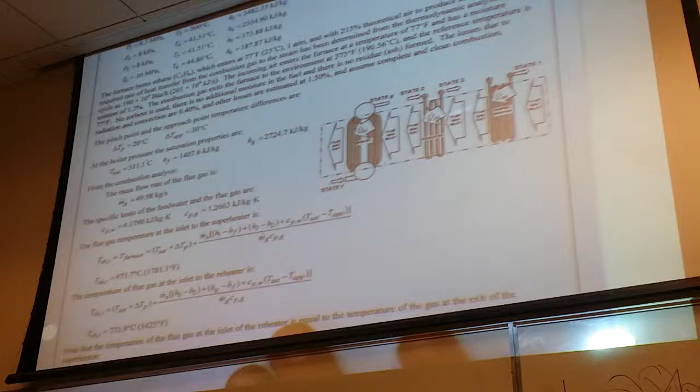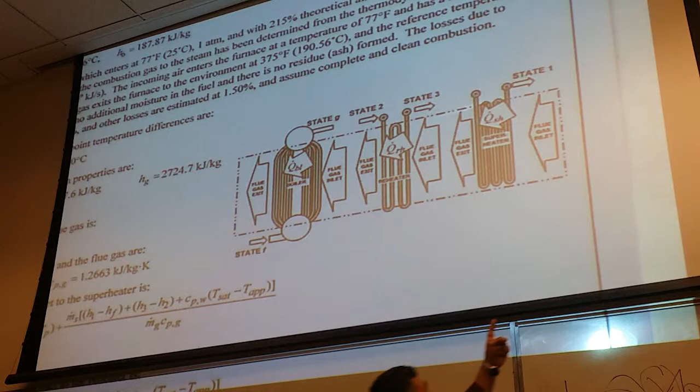Then there's this. And this is where you get to determine how you're going to lay out your components. The way this system was set up was that the gases leaving the furnace first encounter a superheater. The second thing they encounter is a reheater, and then we go on to the boiler.

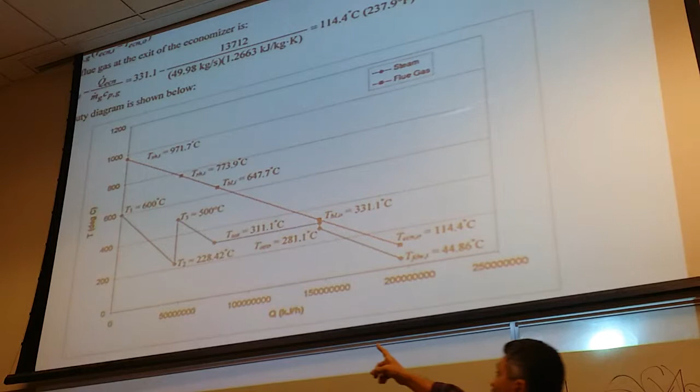So that when we build our temperature duty diagram, we have something that looks like this, where the first thing is, of course, the superheater, the reheater, and the boiler, and so on. So it depends on how you set up the components. So for example, you could have it where the first thing you encounter is the reheater. But you would have to set up your temperature duty diagram accordingly and account for all of the energy transfers

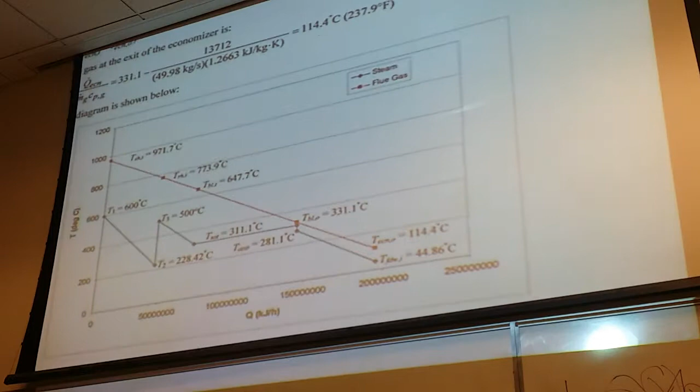that you need. In this case, when I did the calculation, it starts out at a little less than about 971 degrees C, and as we march through the plant, or through the cycle, or through the components, we first hit the superheater, onto the reheater, and the boiler, and each time we lose energy in the flue gas. So how you arrange those components is up to you. You just have to be able to account for them in your sizing calculation. And again, like I said, this is based on having a configuration that looks like this.

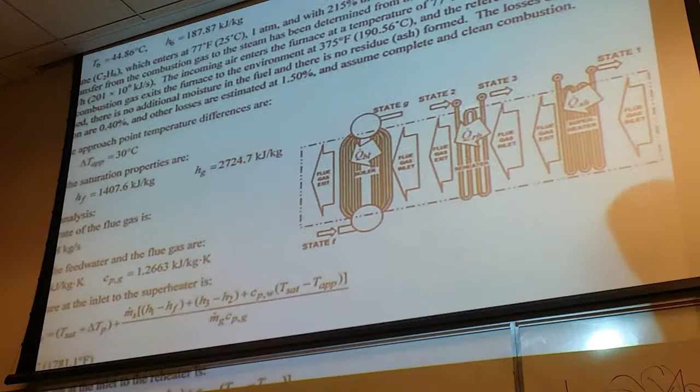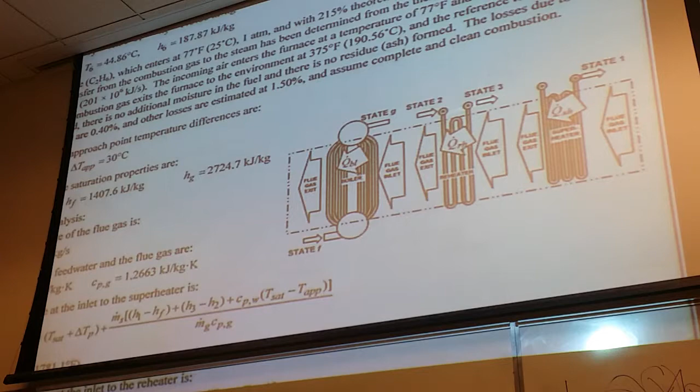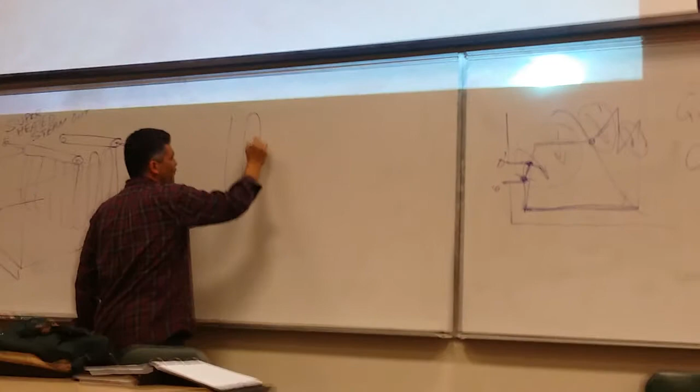Is there a specific geometry the reheater has? Is it a single tube that goes through? I mean, yeah, typically they are, and I'll draw it on the profile, but it is essentially a tube that kind of folds over itself like this, and then it's connected to a header. And then there will be a multiple series of tubes, so that if I'm looking at it from the front, what I'll see is a bunch of tubes. So it's similar to the superheater.

Yeah. So what happens is steam will come in here, and it'll move through, and then it'll come out the other end. And it'll be connected, like I said, in some of the header. That might be in the boiler, right? Reheat. I'm sorry, what? This is reheat, yes? This is for a reheater. Single phase heat transfer.

Going back to the condenser, so if we decide to add another condenser, you're basically taking, say in our case, we have 3 power generation sets. You have what? 3 power generation sets. So we would have 2 on each. Is that how you're setting it up? Is that not? You're the designer. Okay. So if you have a power generation set, that's the mass flow rate and all the states and temperatures and everything, you're meeting the power output requirements.

Your problem now is, okay, I now need to condense that steam. And the problem you're finding is if I have one condenser, the heat transfer required is excessive, and I'm not able to design a reasonable condenser, in which case I'm giving you the option of splitting that steam into, say, 2 condensers. And if you're having 3 identical sets, then you're essentially running 6 condensers.

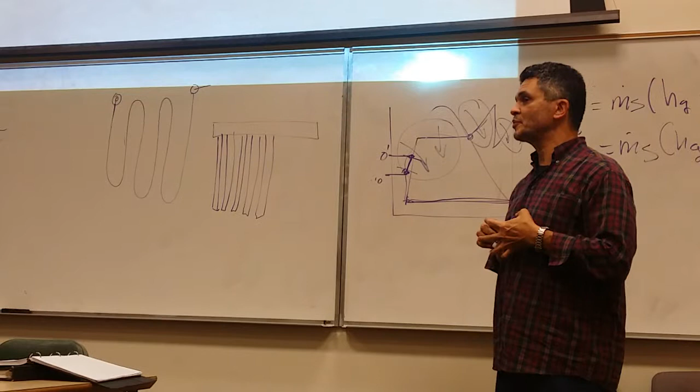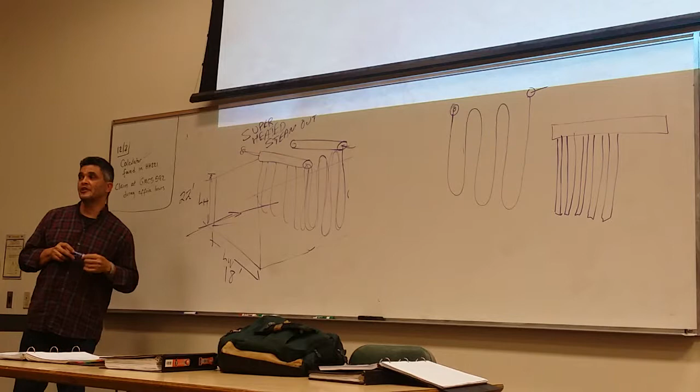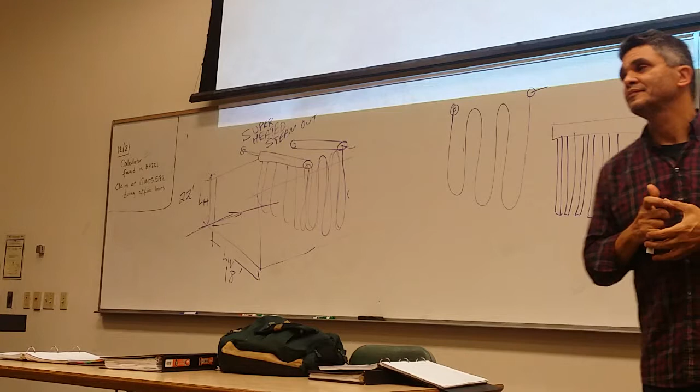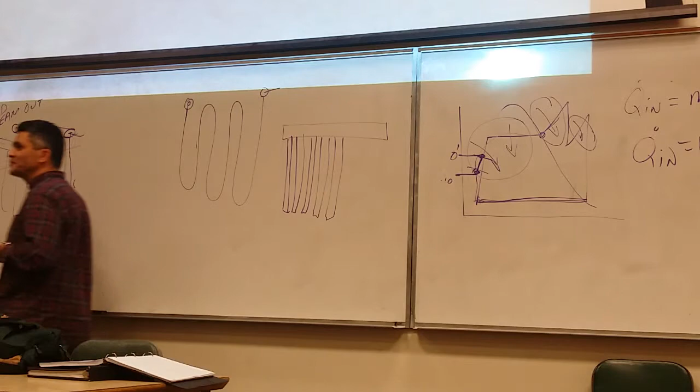Now, I believe I also gave you a series of tables for the heat transfer properties of steam at different pressures and temperatures for superheated steam. That's on Blackboard, and that's what you would use when you're dealing with superheaters and reheaters, because now you're dealing with elevated temperatures and pressures. But if you're dealing with the saturated values, you'd have the tables in the heat transfer book. And I don't know if I posted those tables because they're in your heat transfer text. Unless you sold it, you should hopefully still have that.

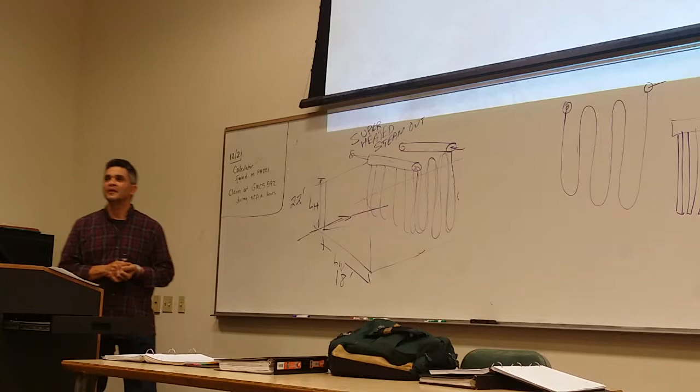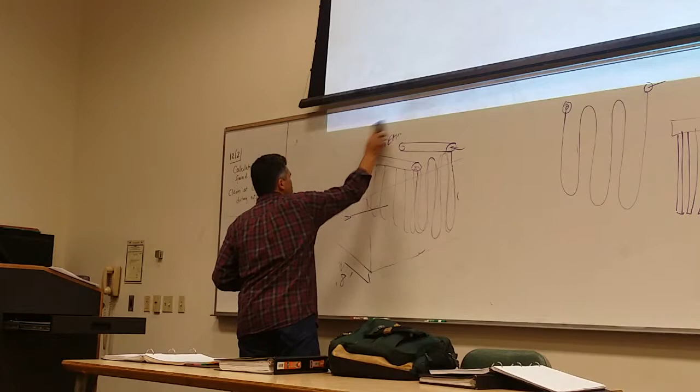Yes, sir. How can we handle the pressure flow across the system component, or just the pipe? I'm sorry, what? For the pump? Yeah. How can we handle the pressure flow across the system component? What is your question? How do you handle the pressure drops? No, once we calculate the pressure flow, how can we apply this number into the sizing for the pump? For the sizing for the pump? Yeah, selecting the pump. So how are we going to apply the number we get from pressure flow? Let's say for the condenser, superheater.

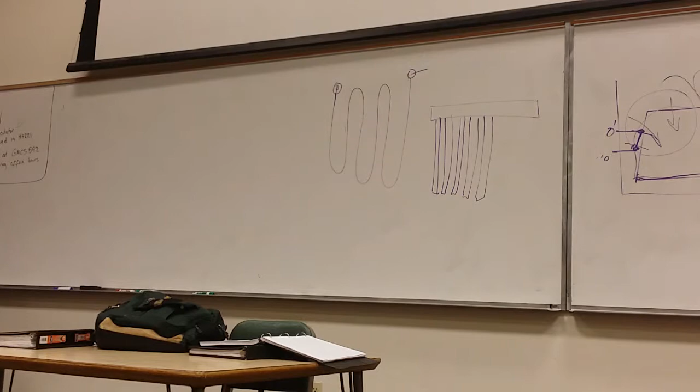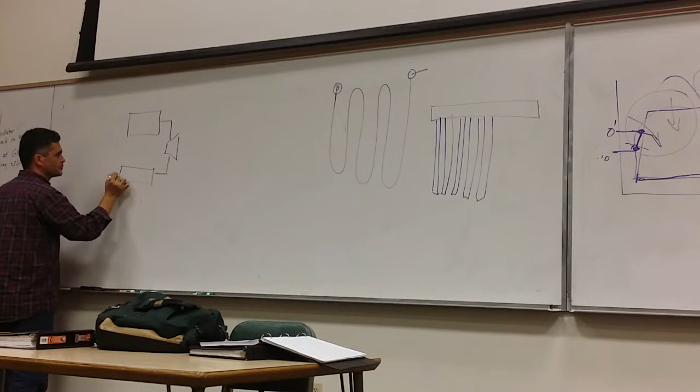In other words, okay, this is my system. And what's your question? So let's say the pressure drop across the superheater is 100 kPa. So how can we use this number for pump selection? Oh. And your pumping power requirement is going to be whatever your target is plus whatever pressure drops you're losing, because

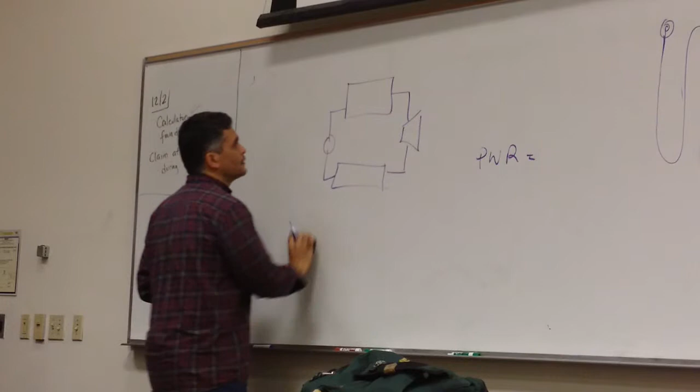if your goal is to operate at a certain pressure and have a certain work output, let's suppose that you're starting at 8 kPa down here at the condenser, and your goal is to pump it up to, let's say, 10 megapascals. That's the system requirement, right? That's what you need to be able to pump. But the other problem is you have pressure drops across the condenser and across the boiler and across the superheater, say. What about over generic piping? Yeah, and if you have frictional losses in your piping, let's call that piping losses.

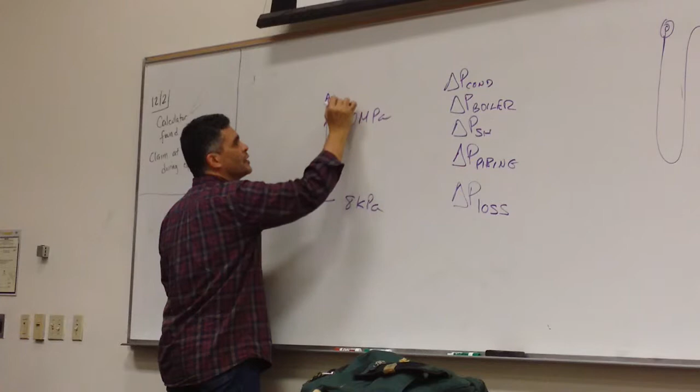So these would then be your delta P, what we'll call a loss. And now you actually have to pump this plus to account for that. So your pump actually has to account for those friction losses because they're essentially eating up some of that pumping power. So you would add that to it, just like we did for the pump characteristic curve when we were looking at a pump through a condenser. You're looking at the pumping power requirement to maintain a certain head, plus all the major and minor losses, because that has to overcome all that.

Otherwise, your system is going to get degraded by that amount, and you're not going to get the power output that you wanted. So, for example, when you weren't counting on pressure drops, you got 70 megawatts. But when you start calculating all the pressure drops, especially outside of the superheater, your pressure dropped a little bit, so now your enthalpy isn't what you thought it was.

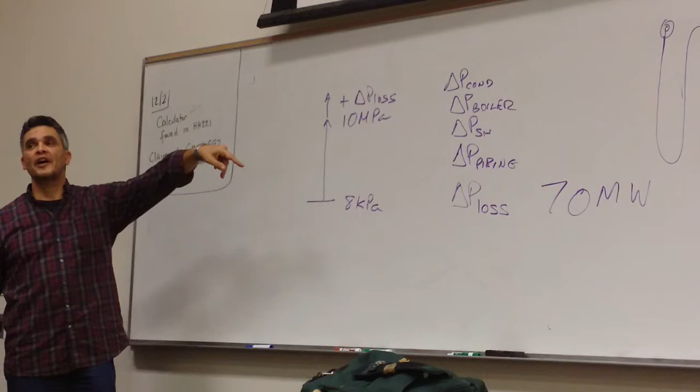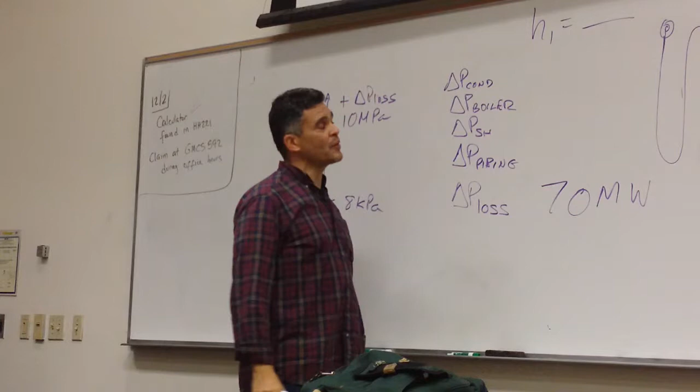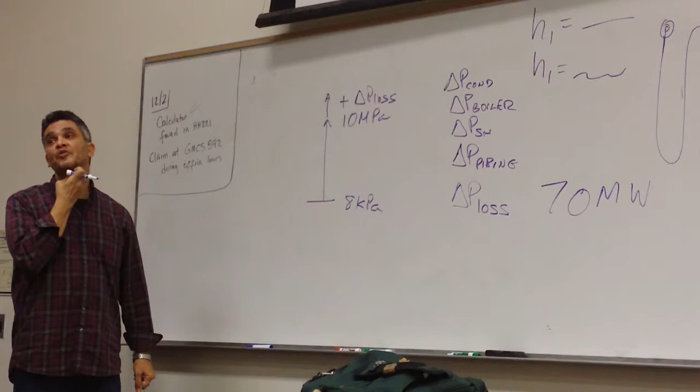Because when you calculated it without pressure loss, you got an H1 is equal to some number. But then when you calculate it with the pressure loss, you're now getting an H1 that's something different. And that goes into your work calculations, correct? So you're not getting the work out that you thought you were. So if you wanted to account for that, you'd have to then put that in there, so that you'd actually have to operate a little bit higher or accept the losses.

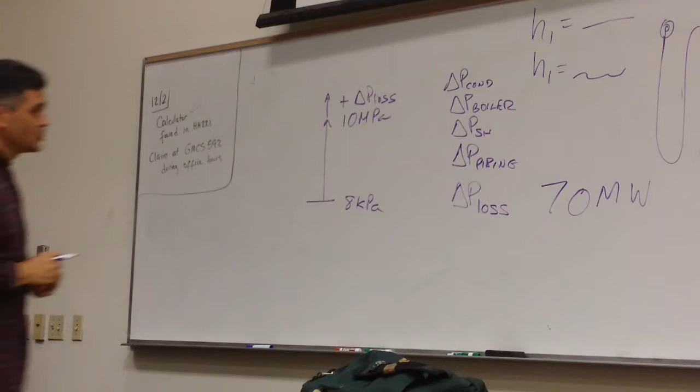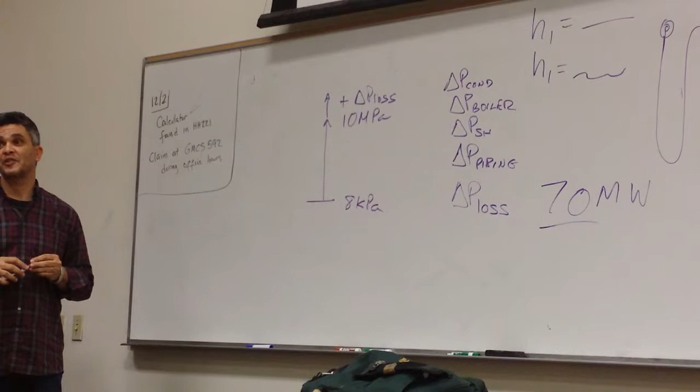In which case you'd have to then design your system so that even after you take into account all those losses, you're still delivering a minimum of 70 megawatts. And this is why I cautioned you early on not to just settle for getting to 70 megawatts and calling it a day, but rather trying to put in some buffer because you're going to see losses in the system due to pressure drops.

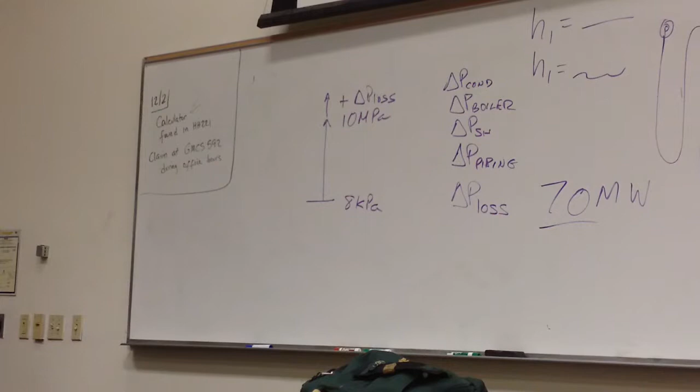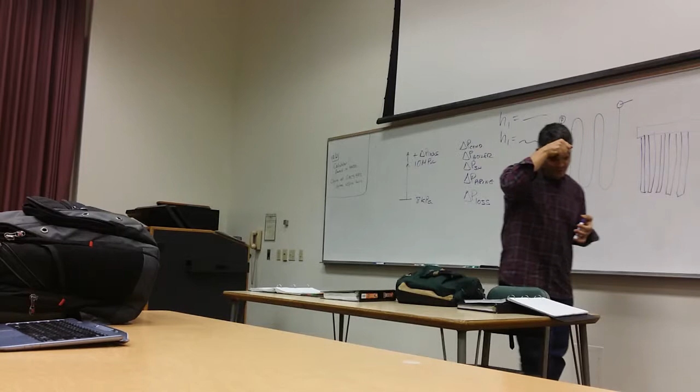Do we have to do the same thing for heat loss or no? No. We're gonna consider certain things to be adiabatic, so we're gonna consider things like pumps and turbines to be adiabatic in the sense that any heat loss that they lose is negligible in comparison to the work output. And we're also going to consider that condensers and feed water heaters and the like are insulated to the environment, so all of the heat transfer is taking place where you want it.

As well as the generic piping? Yeah, for the generic piping, we'll assume that there's not going to be any appreciable heat loss, just for the purposes of this project. When you calculate the pipe losses, it's given that from the boiler to the branch of your 4 turbine sets it's 155 feet. What about the distance from that branch to the actual turbines? Do we have to include that? Negligible.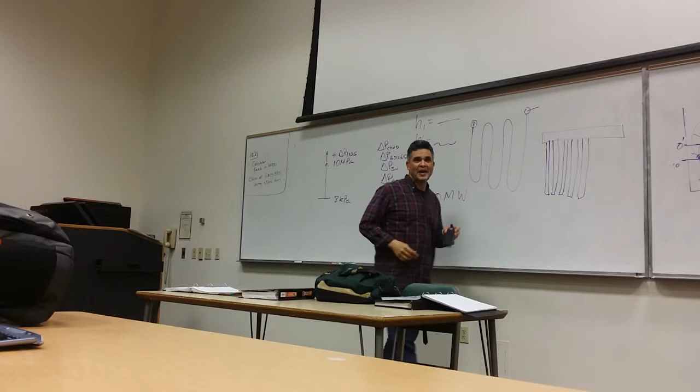Because then, like you were asking, how detailed do I want the schematic? So we don't have to include the 90-degree turns? No, I'm not asking you to come up and calculate the piping to each individual turbine and the piping from the turbines to the condensers and the piping from the condensers back. So the pressure entering the turbines is equal to the pressure out of the boiler minus the pressure loss over that 155 feet? Yeah, do it like that. Okay.

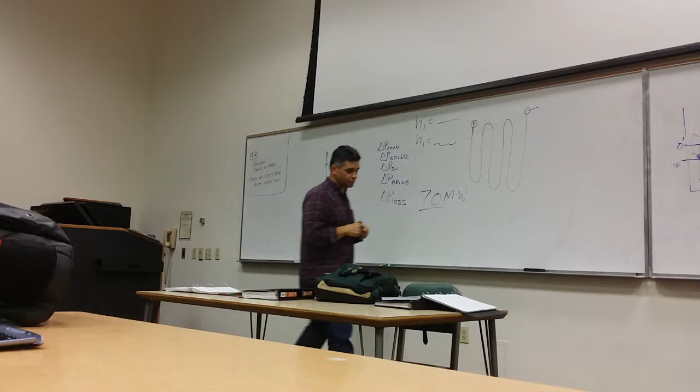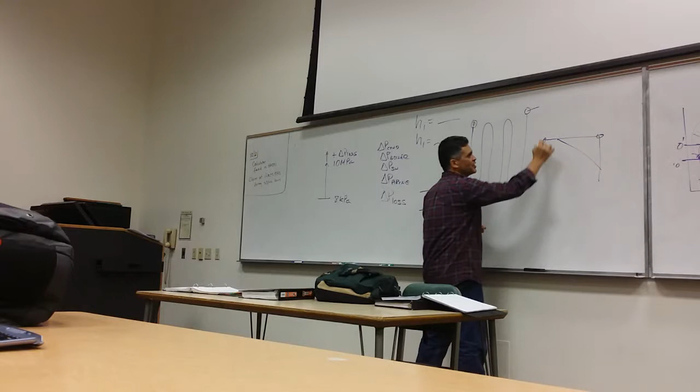Any other questions? Yes? So in regard to estimating the length of the pipes, you just want us to go off the schematic you gave us? Yeah. I'm not giving you any requirements on how you route it. That's up to you. Like I said, you can go out from here straight down and do a 90-degree elbow. You can do two 45s. You can do something like this. However you work it out, and you can do little trade studies to see which one is the most beneficial.

But all I'm giving you is the overall location, and how you get from the superheater back to the turbine is up to you. Other questions? Yes? For the hand calcs for the combustion, is it okay if we just show you how we got our numbers and put it in Excel without having to write out the whole 6 pages that we're copying exactly anyway?

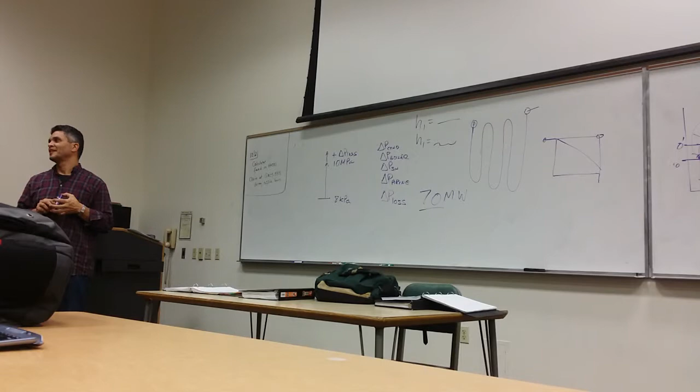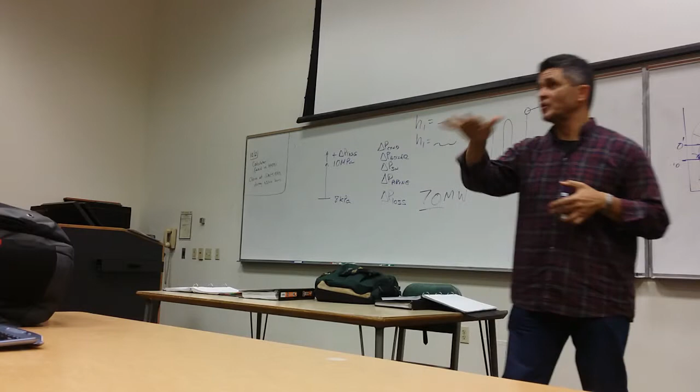For the combustion calcs, because they are lengthy and tedious, you can go ahead and abbreviate it somewhat. Okay? You could skip a lot of those intermediate steps and just go to the meat of it. But what I do when I'm looking at your reports is I do sit down and I will go through your calculations. So I will want it written out, like your sizing and all those things, so I can follow it. It's hard for me to follow an Excel sheet.

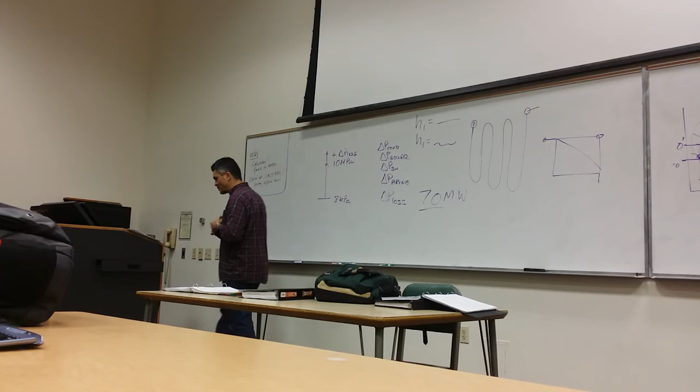But I can do this, and I will hope that you will have one of your teammates perform a check, because I sometimes find